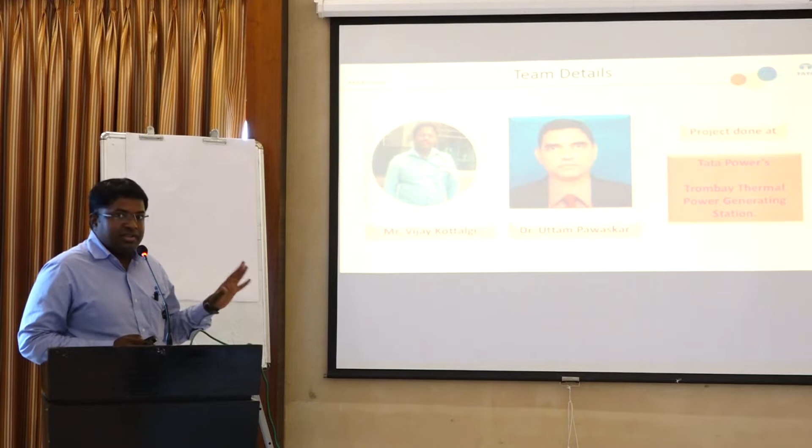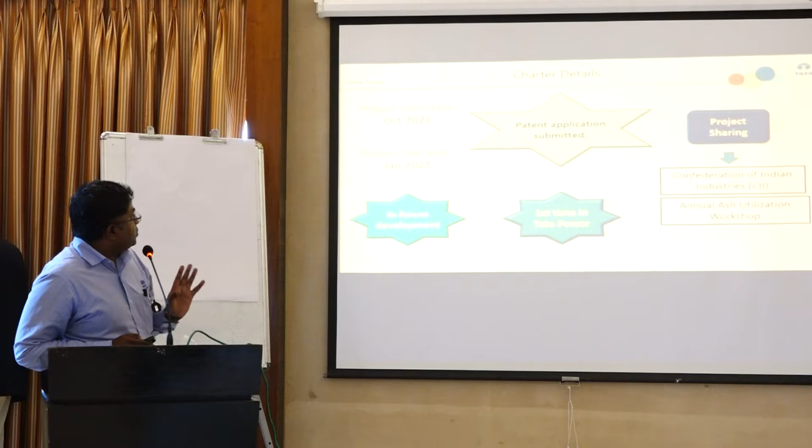This is about charter detail. Project started in October 21 and we successfully completed it in January 2022. As it is totally developed in-house, we have not hired anyone from an external agency, and it is first of its kind in Tata Power and even in the power industry. Hence we applied for the patent.

Till now this project has been shared in the Confederation of Indian Industries, where we received the Platinum Award for our project, and we have discussed this project in our annual ash utilization meet.

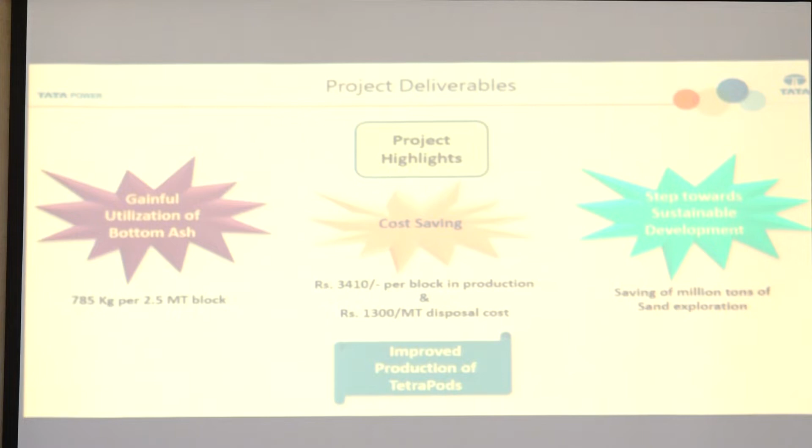These are the project deliverables, what we are achieving after implementation of this project: gainful utilization of the bottom ash, cost saving, and steps towards sustainable development, which is in line with today's theme organized by the Society of Power and Energy Professionals.

Let's have a look at the problem statement. As we know, all thermal power plants run on coal, and when we burn coal in the boiler, two byproducts are formed: one is bottom ash and the other is fly ash. We know fly ash has a definite market now, and it is being used by cement industries and also in ready-mix batching plants.

But on the other hand, bottom ash has no definite use at this moment across all thermal power plants. As coal burning is a continuous process, bottom ash is generated continuously, and it is generally considered a waste product. It requires large space for storage and needs to be disposed of under MPCB guidelines, which involves huge statutory compliance and huge cost expenditure.

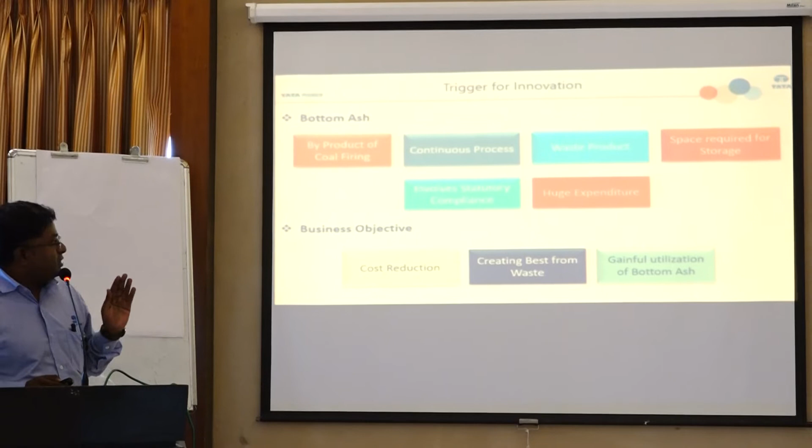On the other hand, management's business objective always looks for cost reduction and creating something from waste, and they are always looking for the gainful utilization of bottom ash as much as possible.

This is our present scenario at Trombay Thermal Power Station. The annual ash generation is near about 6,000 to 7,000 metric tons, and we spend near about 1 crore for the disposal of this bottom ash. This bottom ash is disposed at near about 40 to 45 kilometers away from the plant, in an area approved by the MPCB, with maximum statutory compliance.

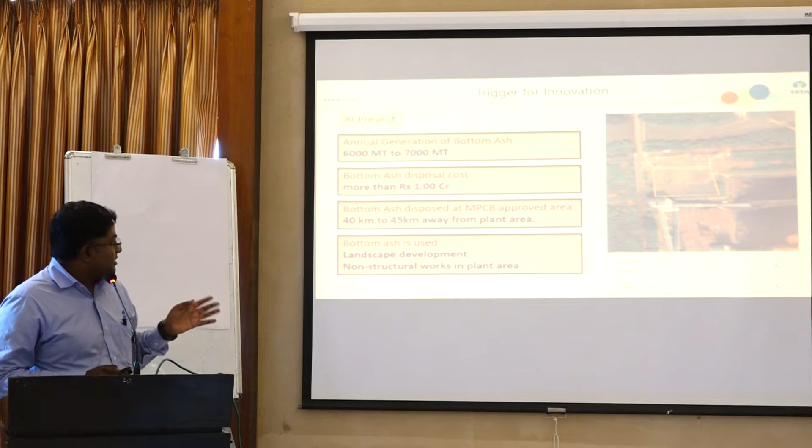Also, we have started using this bottom ash for landscape development and various non-structural works in our plant area.

Now, the solution offered. This slide will explain why we chose the TetraPod for using this bottom ash, because the TetraPod is the single largest cement article used as an energy dissipator, and when kept in a staggered manner, it also acts as a wave absorber. Raw material consumption is very high in the TetraPod compared to other civil articles like bricks and paver blocks.

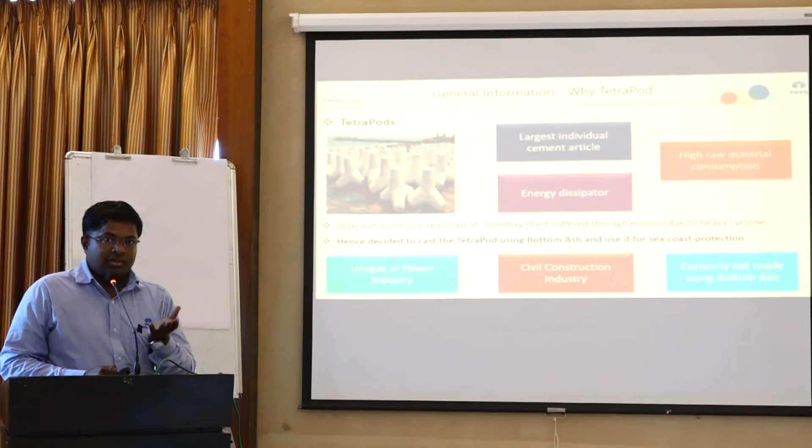Hence we chose this TetraPod. Recently, in the last monsoon, we suffered some land erosion at our sea coast, and collectively we decided to use this bottom ash to make a TetraPod in-house. This concept was totally unique for the power industry because, to the best of our knowledge, it has not been done by anyone else - making a TetraPod using bottom ash.

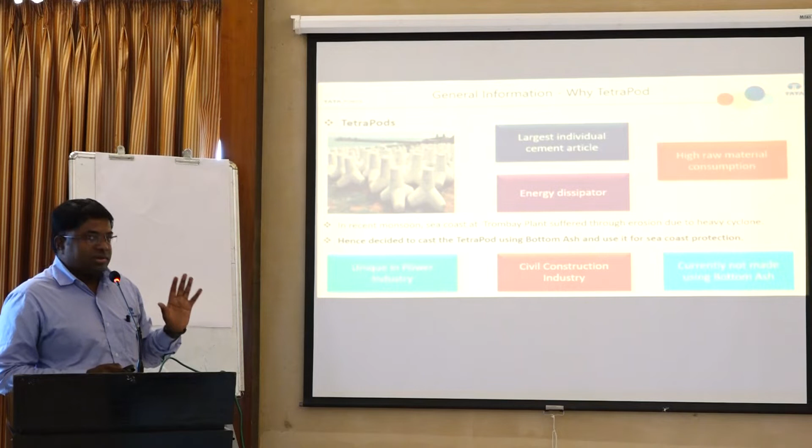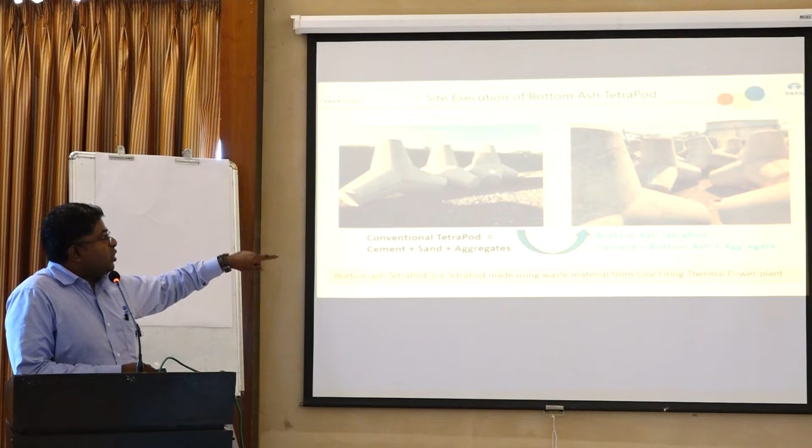So we started the implementation of the solution. The bottom ash TetraPod is a tetrapod made using waste material from the coal thermal power plant. The conventional tetrapod has a composition of cement, sand and aggregate, whereas the bottom ash tetrapod has a composition of cement, bottom ash and aggregate.

To go ahead with this solution, we defined some engineering parameters for this job. We fixed the grade of concrete as M30, and since we were doing it for the first time, we did some reinforcement in this bottom ash. The raw material we decided on is cement, pond bottom ash and aggregate. Generally, the standard weight of the bottom ash tetrapod varies around 2.5 metric ton, and it is ideally used at various sites.

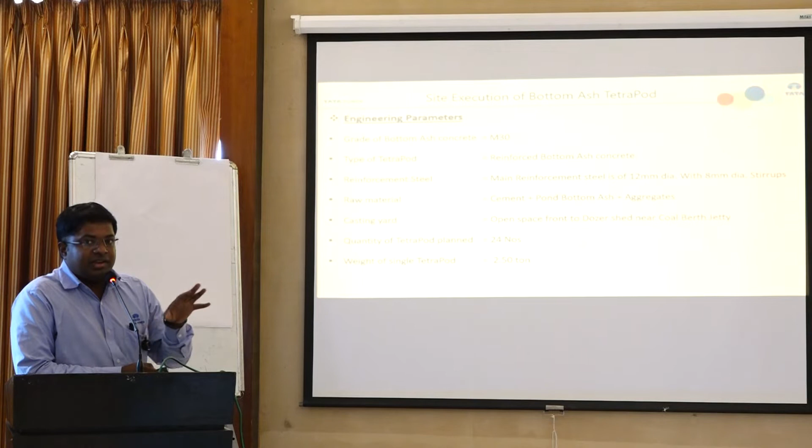Here you can see the bottom ash we removed from the ash pond. You can see the quality of the bottom ash, it is as good as natural sand because we are using imported coal. Hence, the quality of bottom ash which we are getting is near about sand.

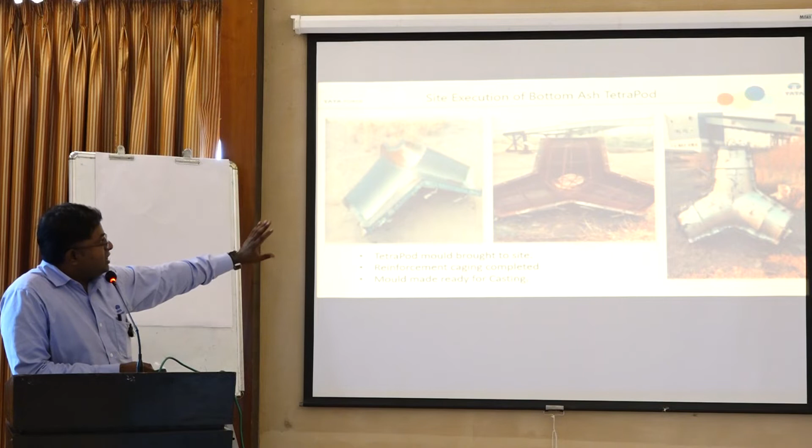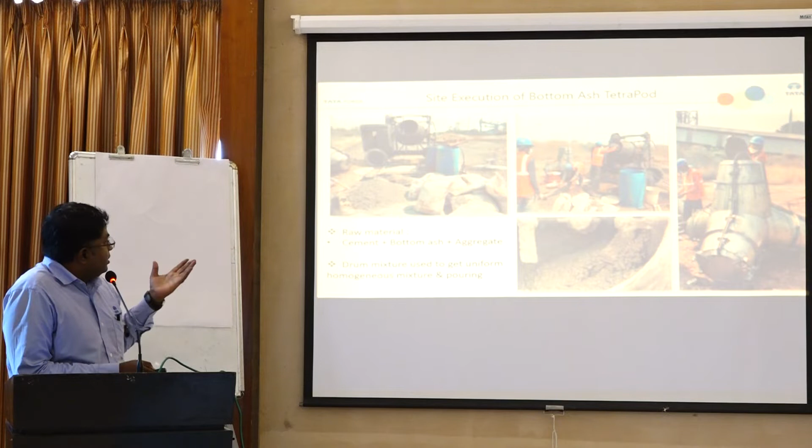This is the tetrapod mold. Here we brought the mold to the site. Reinforcement caging was done inside the tetrapod, and the mold was ready for concreting. To get a better mix, we did the mixing mechanically with a drum mixer, and then we cast the tetrapod.

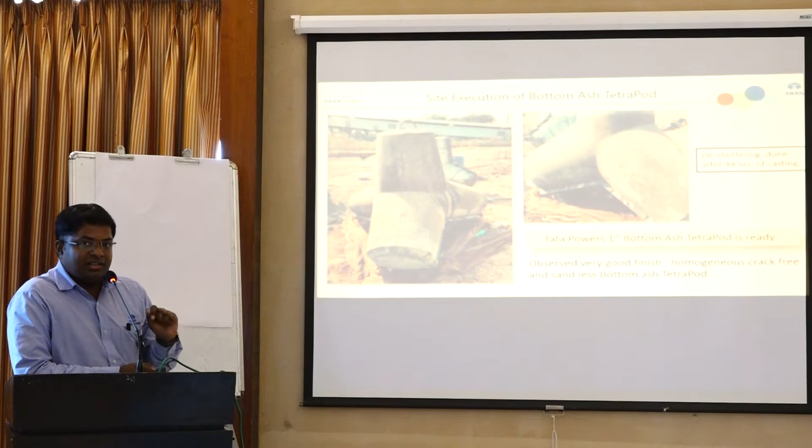As we were doing it for the first time, deshuttering was done after 48 hours of curing. Here you can see the first tetrapod, the bottom ash tetrapod, is ready. We observed a very good finish, homogeneous, crack-free and sandless bottom ash tetrapod.

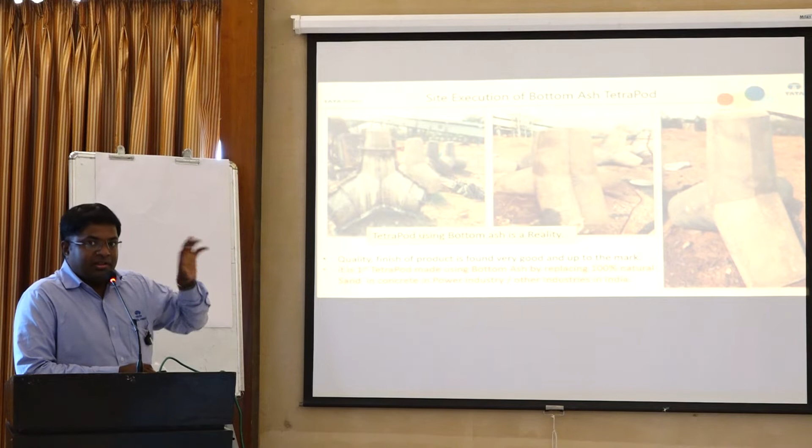After getting success on the first product, we did multiple castings. This is the first batch of bottom ash tetrapod, done by replacing 100% of the sand in the cement composition. That is, the concrete we normally do is cement, sand and aggregates. Now we are replacing that sand completely with the bottom ash.

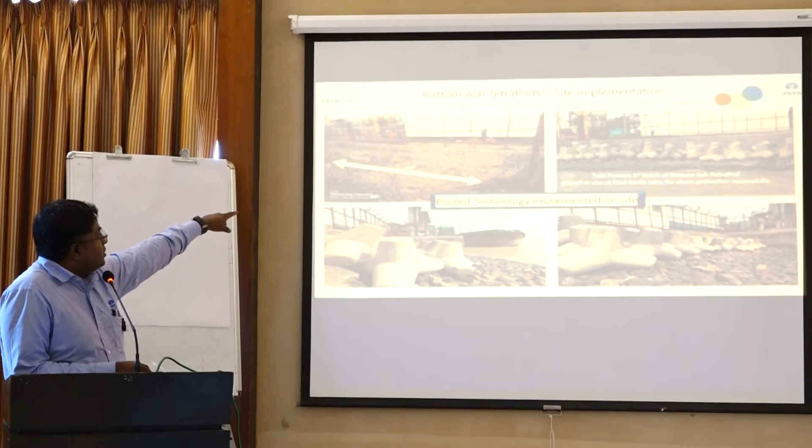Here you can see the earlier course, which was our coal berth jetty. It was having some erosion, and we have placed the newly cast bottom ash tetrapod at our shore.

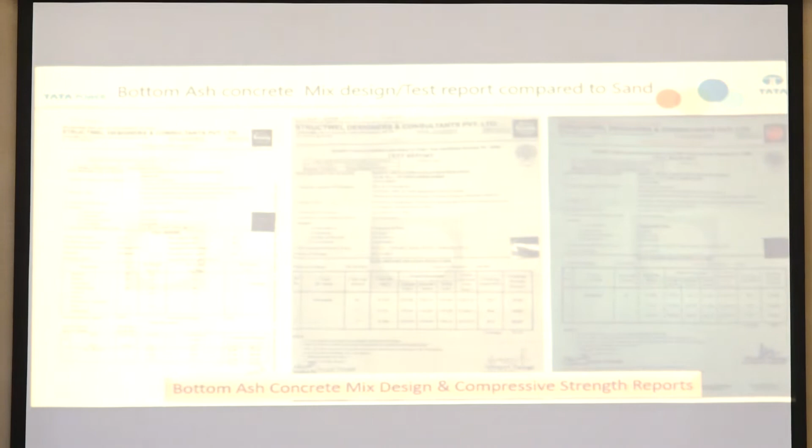To get support for this innovation, we also did some engineering calculations. The mix design was done, and then we carried out some compressive strength tests.

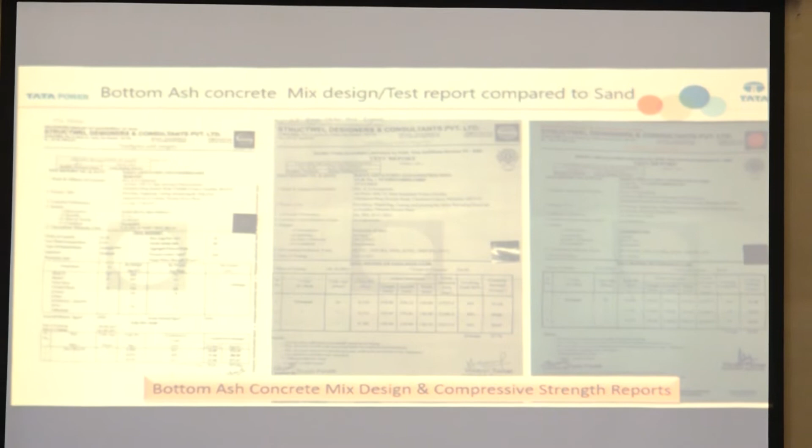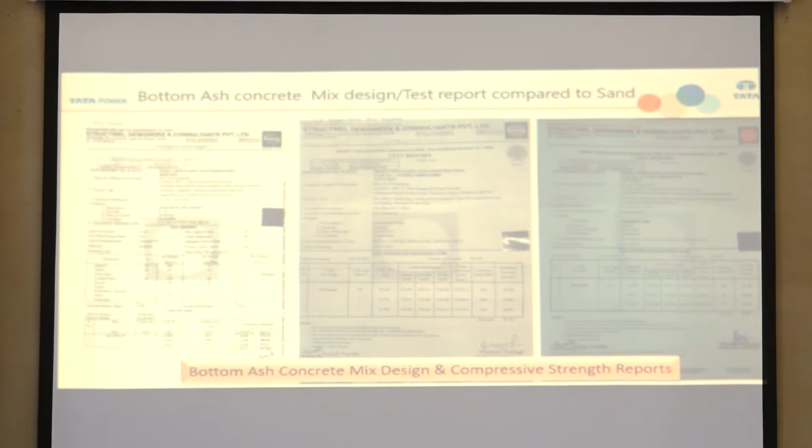Here you can see the strength we had decided on was M30, that is 30 Newton per mm square. After testing, what we actually got was near about 35 to 37 Newton per mm square. It is as good as normal conventional concrete, and we are even getting more strength than that.

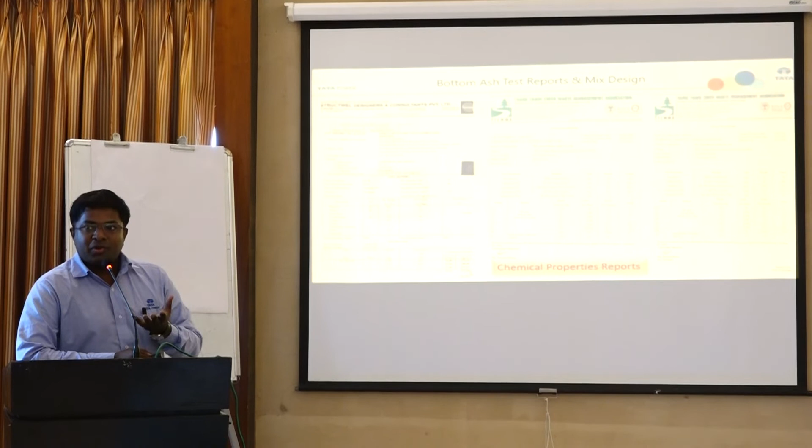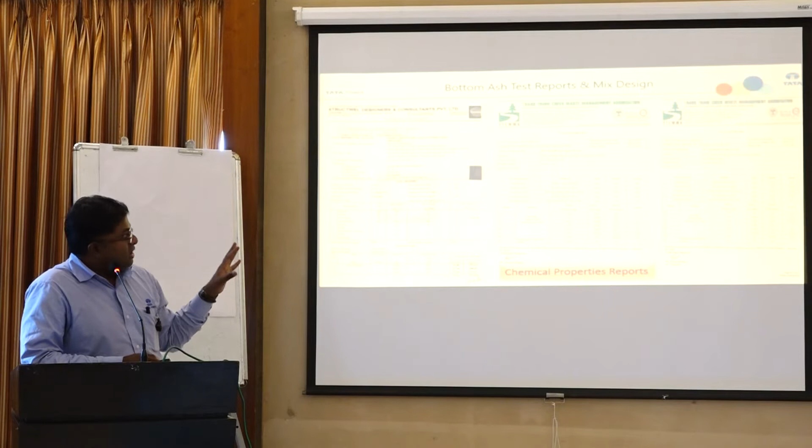Also, as we know bottom ash contains some metals and also some chlorides, to be satisfied with the quality of the tetrapod, we carried out chemical analysis of the bottom ash using NABL accredited laboratories, and we found all the parameters are below the limit.

But what are the main chemical constituents of bottom ash? Sir, bottom ash is unburned coal which is deposited at the bottom of the furnace. It has chlorides as the main component, and also sulfur. We tested all these components, and the limits fixed as per IS codes compared to what we got show that our results are below the IS code limits, meaning it is safe for use.

Is any silica there, SiO2? Yeah, it is there. Probably because it's imported coal, it is lesser. Other Indian coal may have more silica. The silica is definitely going to help for confidence.

We carried out some cost analysis for this. For this 2.5 metric ton TetraPod, we used near about 785 kg of bottom ash. That is, we saved 785 kg of natural sand.

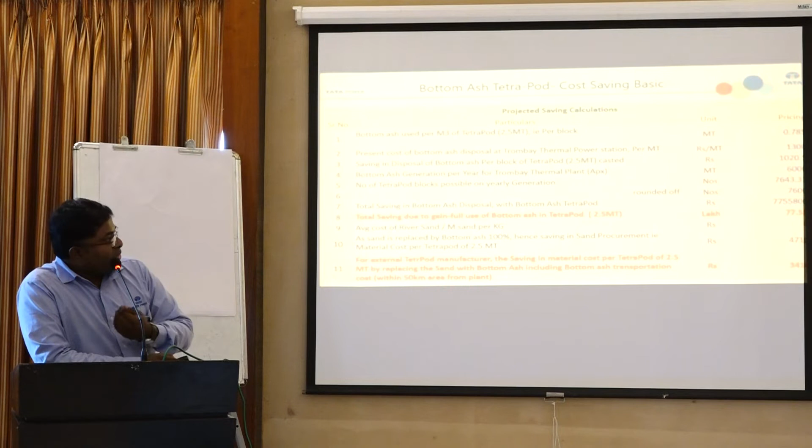And as we are using bottom ash for casting the TetraPod, there will straight away be a reduction in the disposal of bottom ash. So when we consider the plan for the thermal power plant at the Trombay location, we will straight away save near about 77 lakh per year in the disposal of bottom ash.

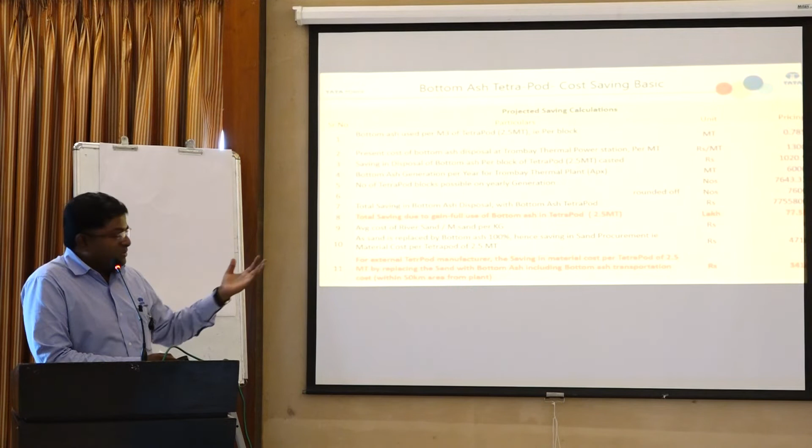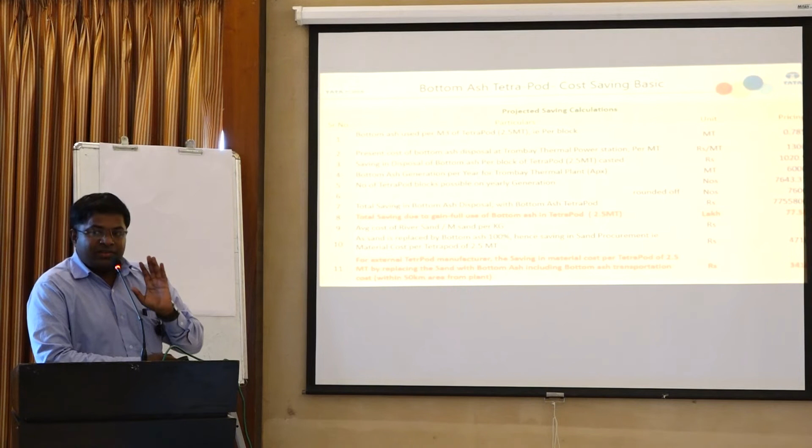Also, if we go for commercialization, if we give this bottom ash to an external manufacturer who is manufacturing the TetraPod, within the standards we have considered, that is within a 50 kilometer periphery from the thermal power plant, we would straight away save near about 3,400 rupees in the production cost of the TetraPod.

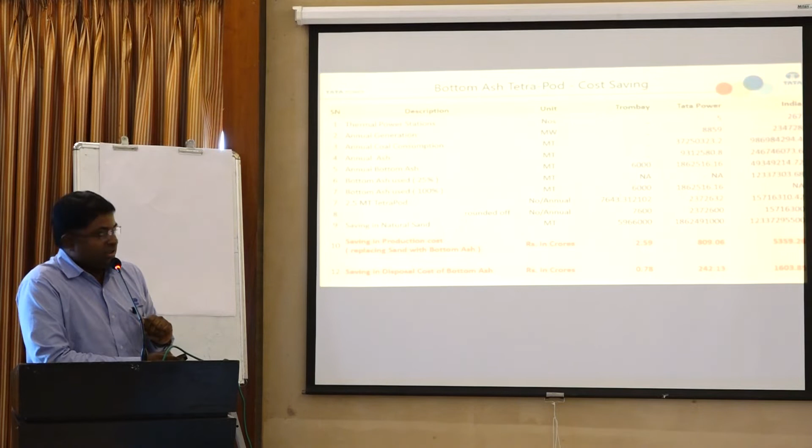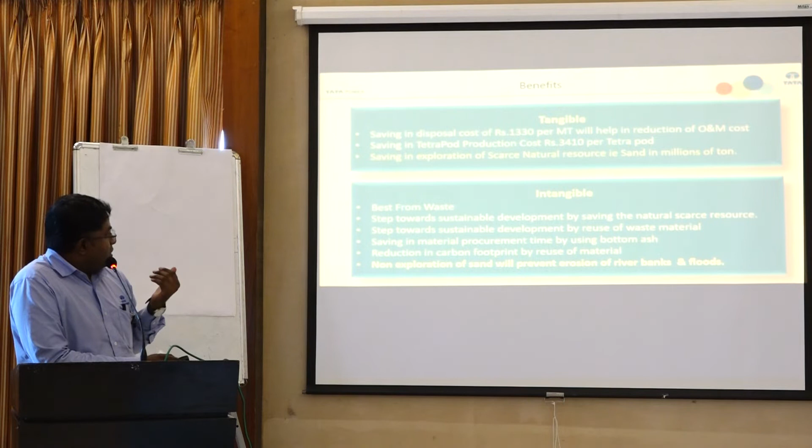Now you can see the tangible and intangible benefits. We are saving nearly 1,330 rupees per metric ton in disposal of bottom ash, and the saving in tetrapod production cost is nearly 3,400 rupees per tetrapod, along with millions of tons of sand exploration saved. There are also intangible benefits, like making the best product from waste material of the thermal power plant, steps towards sustainable development by saving a natural scarce resource and by reusing waste material, and savings in material procurement time since bottom ash is easily available at all thermal power plants. Also, non-exploration of sand will prevent erosion of river banks and flood activity.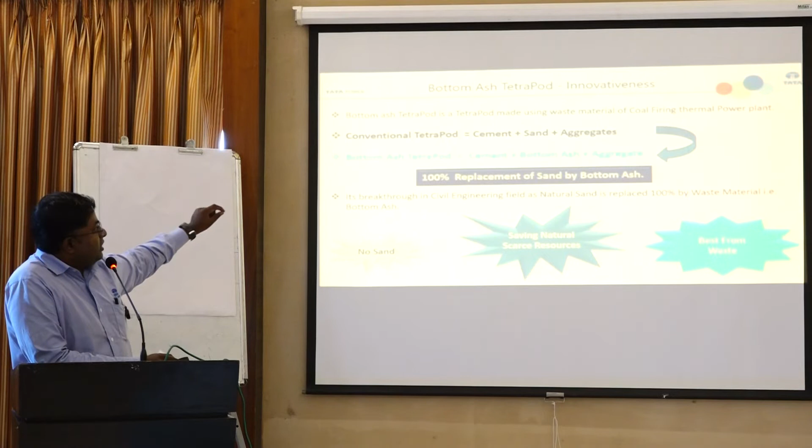Now, why are we calling this very innovative? Because the bottom ash tetrapod is a tetrapod made using waste material of coal-firing thermal power plants, whereas the conventional tetrapod, as I explained earlier, has cement, sand, and aggregate. We have replaced the sand part, which is the fine aggregate in the concrete composition, totally with bottom ash. Many products in the market only do a partial replacement of sand, like 50% or 30%, but in our case we have replaced it totally with bottom ash—100%. So it is a total 100% replacement, and this is majorly a breakthrough in civil engineering. To the best of our knowledge, nobody has done this at this moment.

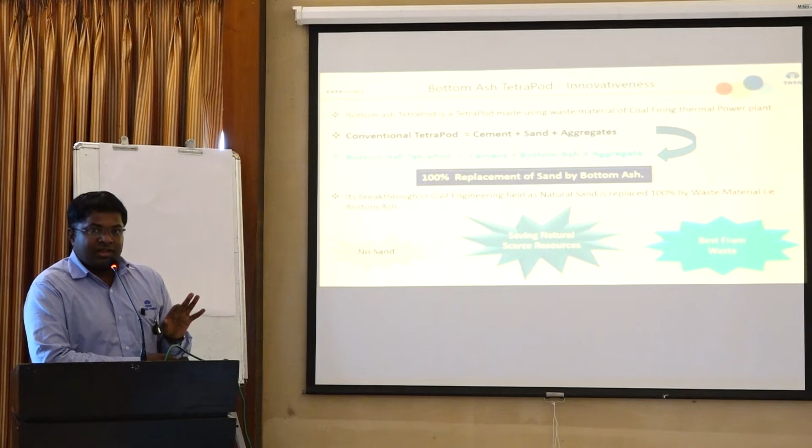So we have applied for the patent in the month of May.

Excellent. So what will be the possible impact after commercialization?

India has a coastline of nearly 7,000 kilometers, and every monsoon we see coastlines getting damaged, causing loss to property and human life. Also, when we think about inland activities, there is excessive sand mining happening, which is related to flooding. So there is a lot of scope for this bottom ash tetrapod to be cast and used for seacoast protection and river training activities.

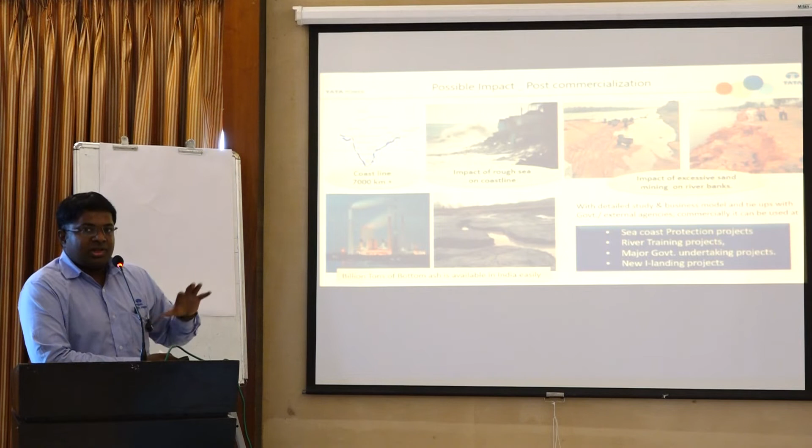Recently, governing bodies are banning sand mining, hence production of tetrapods has come down due to restrictions on sand mining. But on the other hand, in India nearly a billion tons of bottom ash is available at this moment. Hence, we can easily cast these tetrapods and use them for various activities. For this, we are doing some study and building a business model with tie-ups with government agencies, so we can implement this for seacoast protection projects, river training projects, major government undertaking projects, and new islanding projects—like the planned statue of Shivaji Maharaj in the sea, where we can use this type of product.

At this moment we have implemented this concept in a pilot project at our Kolbar jetty. We are observing the actual impact of seawater on this tetrapod, and we are sure it will behave as good as a normal conventional tetrapod.

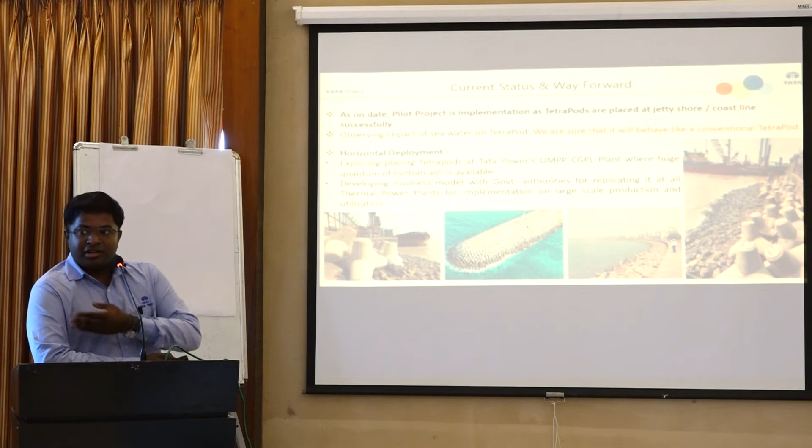For horizontal deployment, we are going through our organization to other thermal power plants where a lot of bottom ash is available, and discussions for that are already in line. We are also developing a business model with government authorities for replicating it at all thermal power plants and scaling up to maximum production. Also, last month our environment department already connected with the MPCB Maharashtra Pollution Control Board, and they also appreciated this activity, and we are taking it ahead to the next level.

This is all about the project. Excellent.

Thank you very much, sir. Questions? I have only one question—that is a general knowledge question.

For this kind of wavy nature in coastal areas, when I go to Marine Drive I see that tetrapods are used. So why are tetrapods required for that waviness of water? Can you kindly tell me the design reasoning for stopping the waviness, or the low tide impact? Why is this particular tetrapod shape used—any idea, any research on that? The tetrapod has 4 legs, and when we put it into interlocking mode to get that particular interlock, by its self weight it stands itself in place.

That's why we have chosen this shape, because the raw material consumption in this tetrapod is very high. By its self weight, it will stand in place and act as a wave absorber, an energy absorber for whatever wave is coming. Because of its self weight, it won't allow water to reach up to the shore, so it avoids the erosion of that particular shore.